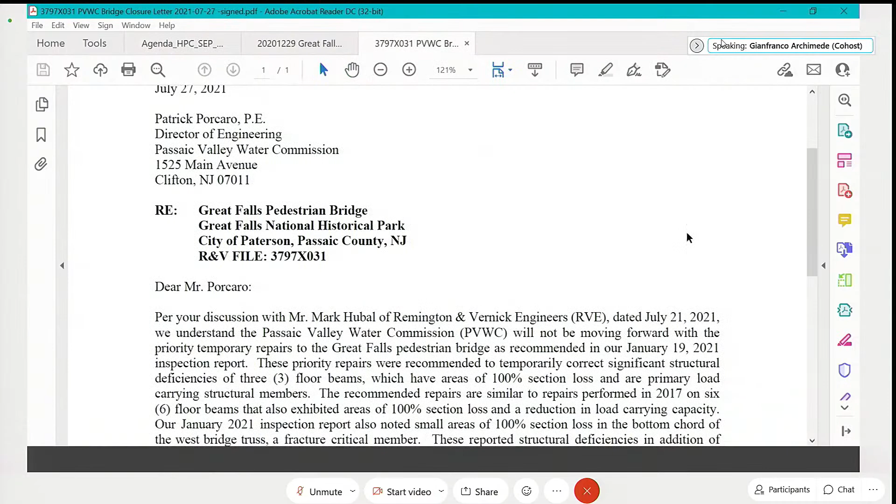Let's see here, that's July. Let me start with this one. This engineering group on screen now, Remington & Vernick Engineers, was working for the Passaic Valley Water Commission, the owners of the footbridge crossing the Great Falls Chasm.

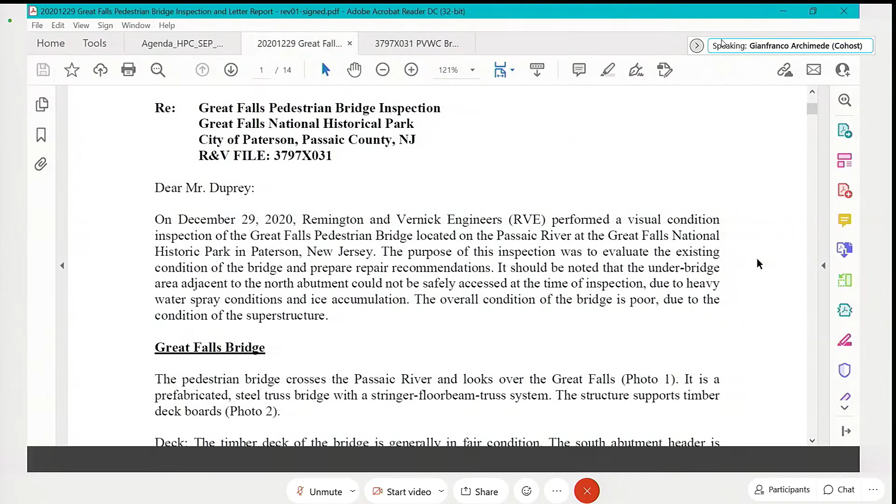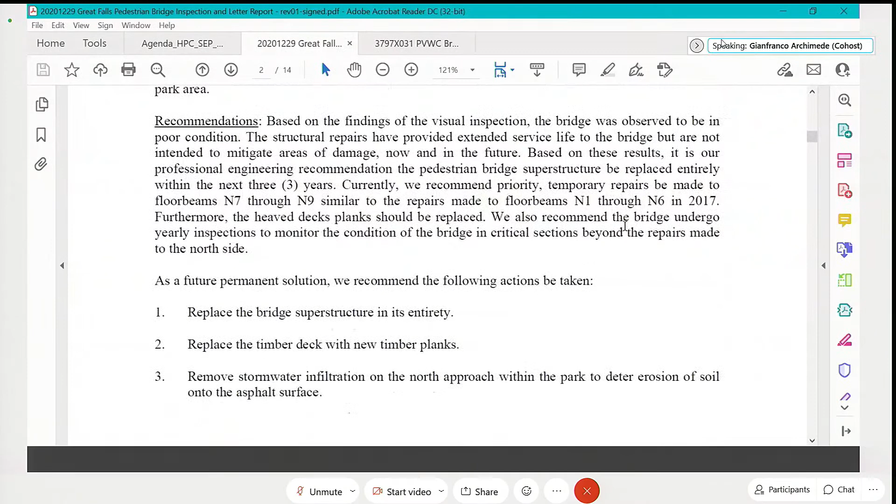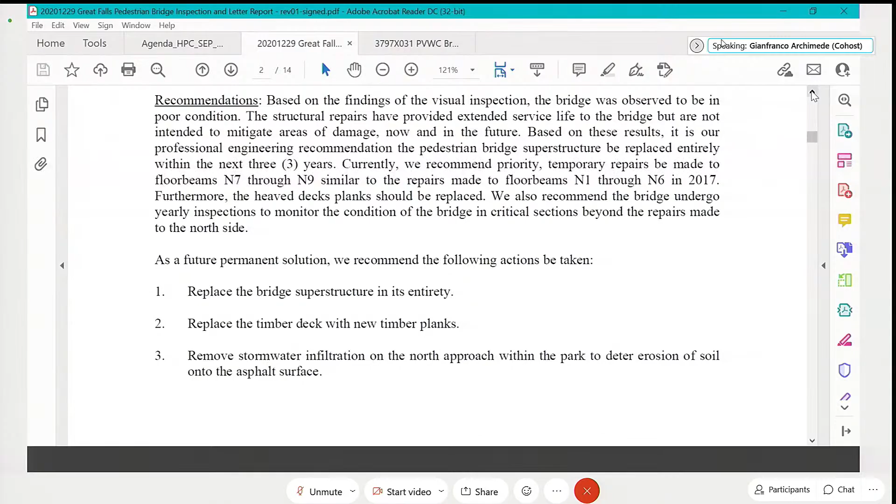This was an engineering report provided back in January after an inspection of the bridge. You can see they're reporting on the deck, the superstructure, and the substructure, and provided recommendations. Right here at the bottom of the page, they recommend the following actions: replacement of the superstructure entirely, replacement of the deck with new planks, and so forth. They identified substantial issues with the bridge to the point where they recommended the majority be replaced, though some parts could be repaired.

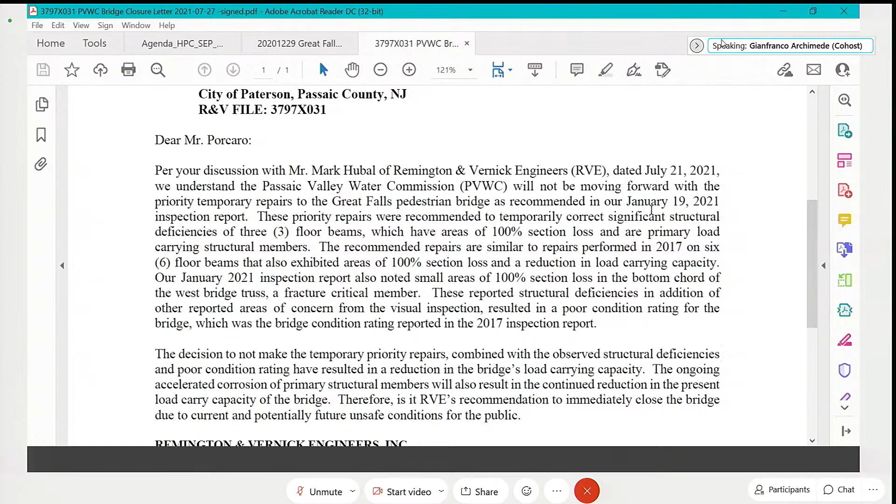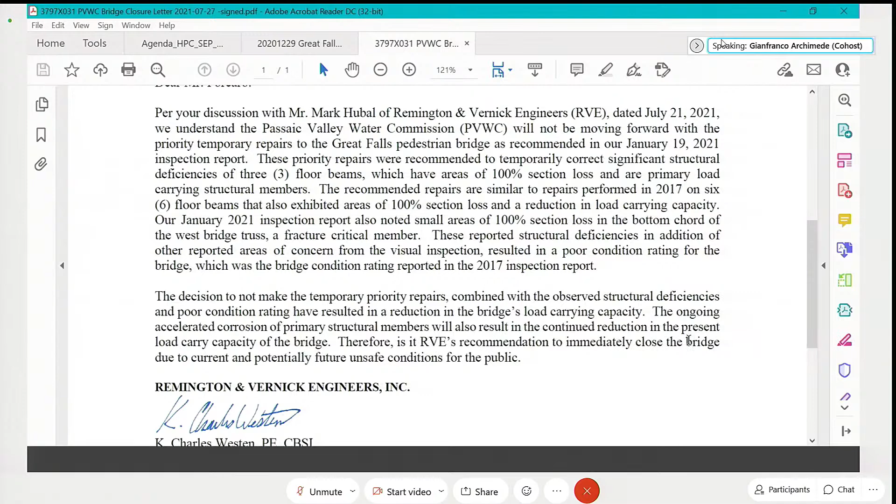The next letter, dated July, about 7 months later, is a follow up to the January 19th letter, indicating that temporary repairs had not been made. Down here in the bottom paragraph: the decision not to make temporary priority repairs, combined with the observed structural deficiency and poor condition rating, has resulted in a reduction of the bridge's load carrying capacity. The ongoing corrosion of primary structural members will also result in continued reduction in load carrying capacity. So their opinion is to immediately close the bridge due to current and future unsafe conditions for the public.

When an engineering group sends a letter like this, it's very serious. The Passaic Valley Water Commission passed this letter on to us. I was informed by Darren Bach, who got this letter about a month later, late in August—around the 25th—when I received copies. He did what he had to do by reaching out to NPS engineers with this information, and they recommended it'd be best not to keep the bridge open. So this happened immediately after we were informed, though the information came to us much later than the date on the letter.

So this is another reason why, with both bridges closed at the moment, having a walking tour of the district isn't really effective or efficient. In talking with Vice Chair Rafal, we thought it best to delay this until there's a better time. We've already started conversations with the Park Service about replacement of the bridge. We're looking at something that would cost about $1 million, and I'm not sure the city would necessarily be involved in its replacement at all, because the land on both sides of the bridge would be owned by the Park Service, and most likely the replacement bridge would be owned by the Park Service too.

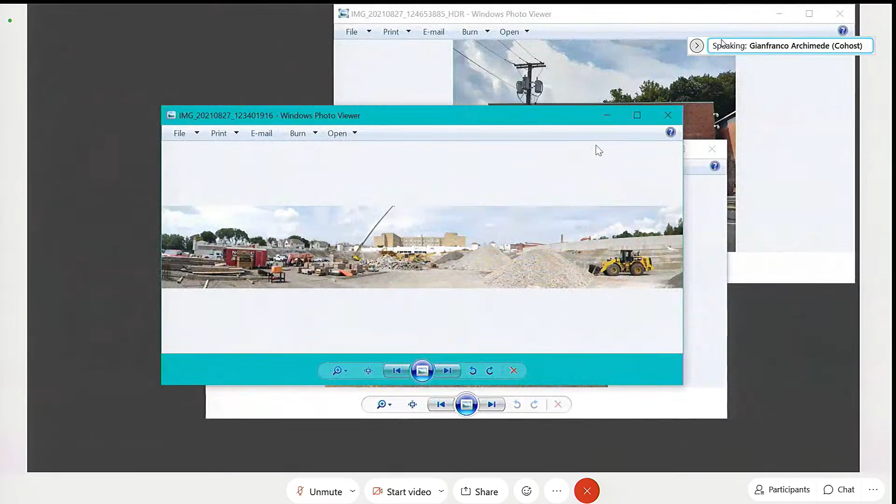Is that sharing? You see the photo on screen now? Confirmed, okay great. Here's a panoramic view of the construction site as it looks now.

You can see it's still a very active site. The piles on the right-hand side represent the demolition material that's been ground up and gotten ready for either taking off site or if any is to be used on site. I'm not sure, it's being stockpiled. But this is another good indication of the continued activity on this site.

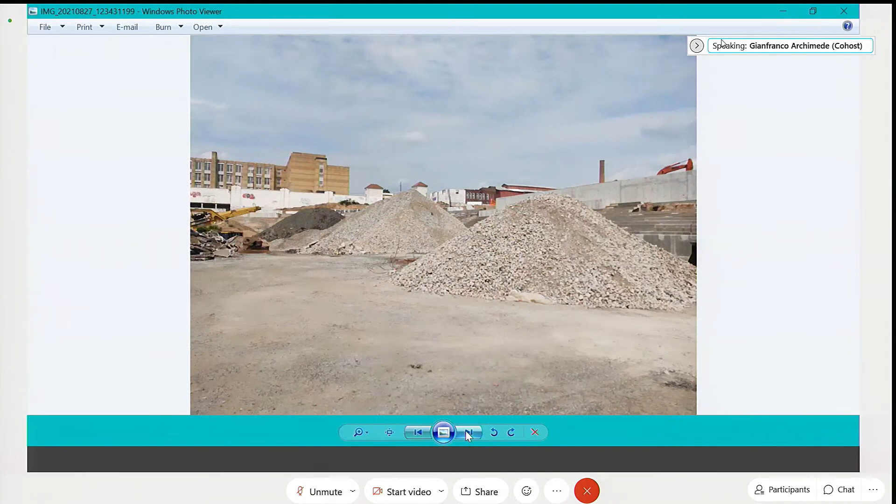This is a typical methodology for dealing with concrete debris. Some of the concrete that was demolished, for example, you can see in the background on the right-hand side of this picture the large new retaining wall that was cast in place. There was a failed retaining wall there, so some of this crushed concrete could represent that demolition portion.

The upper tiers of seating were also removed, demolished, and crushed. This is on the left-hand side. You see the tip of the crusher poking out here on the left side of the screen, and you can see the larger pieces here in the center screen waiting to be loaded into the crusher for crushing.

On the left side of the stands, you can see men working. They've completely removed all lead-based paint, so that was done for a while now. They've chipped out all of the steps, and removed deficient areas that were structurally needed to be exposed in order for the next phase of repairs and rehabilitation to start. Here's another view of this side of the stadium I'm talking about.

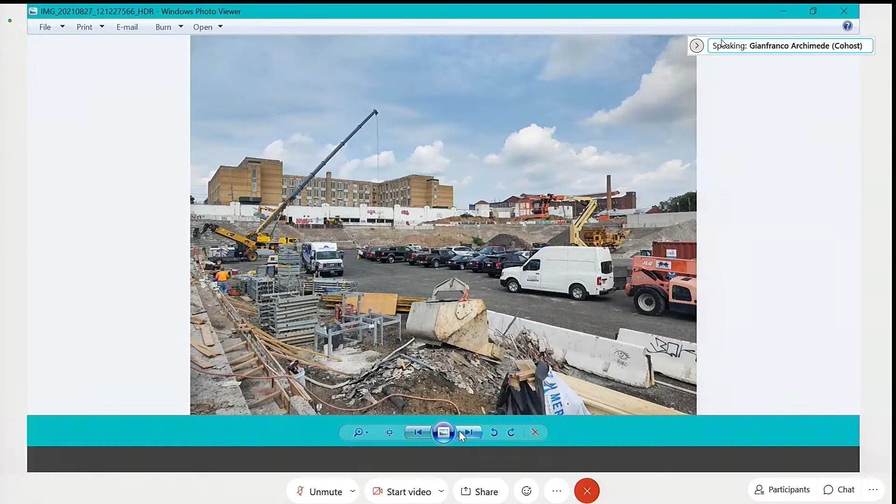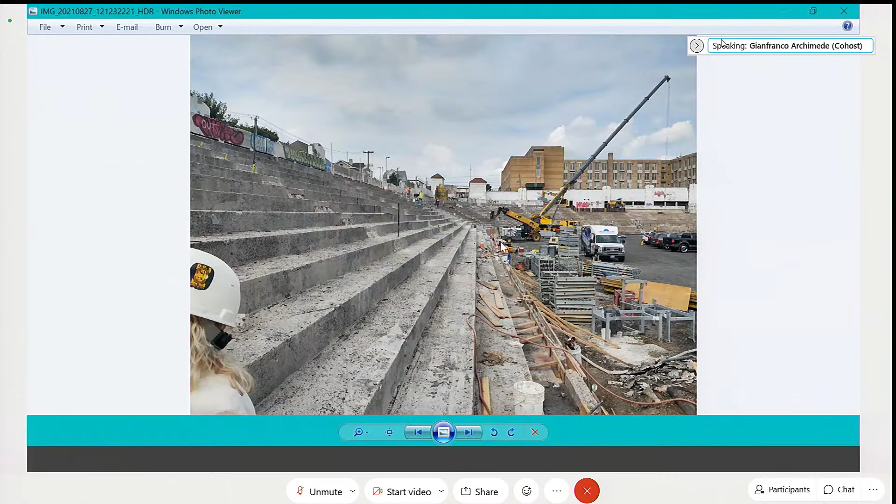Looking along the seating bowl, right here in the foreground where my mouse is, I think I'll post a picture of it next. Let's see. No, I don't.

But right here, you start to see formwork, all this woodwork here. The formwork is the beginnings of the rehabilitation of how the spalled concrete walls are being dealt with. This is what we call all vertical walls that have spalling or loss of material, like on the top side over the years.

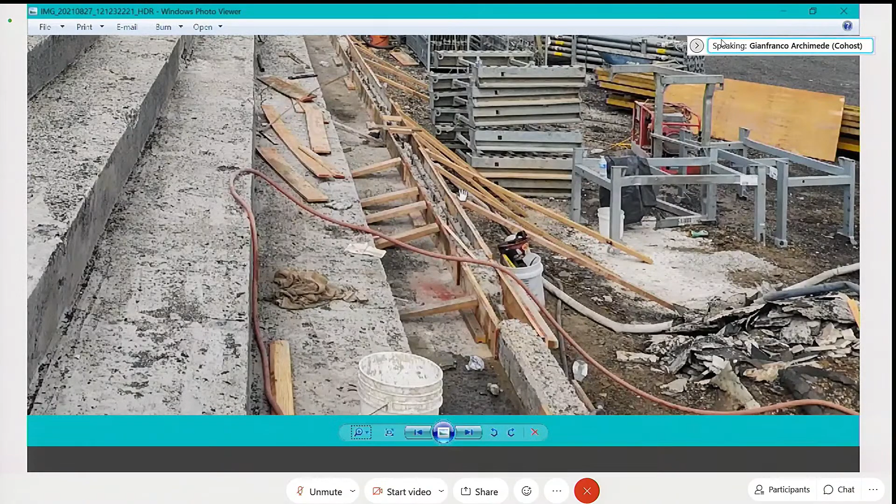I don't know if this will work, but I might try to just blow it up a little and move it. You can really look down into this now and see how the top of the wall is saw cut. The rebar, the reinforcing bars that are inside the walls, are exposed, and then these wooden forms are built around it. They will come back and literally pour concrete right into the top of the wall to create a new cap where the old concrete was lost.

So this is a typical repair that is correct for preservation purposes, and they'll be doing a lot of this in other parts of the stadium. There's a lot of degradation along the field wall in the back of the bowl, and on these walls on the rear of the bowl, up around where the concession area is.

You can also see here in the upper left part of the frame some concrete formwork that is starting to be installed, where the new toilet rooms and the new upper tier seating will be reconstructed. That seating was removed so they could build the toilet rooms on both sides of the seating bowl, kind of subterraneously, like underground, and then they'll replace the seating that was taken out on top of it. You can see the stairs have been ripped out, as I mentioned earlier as well.

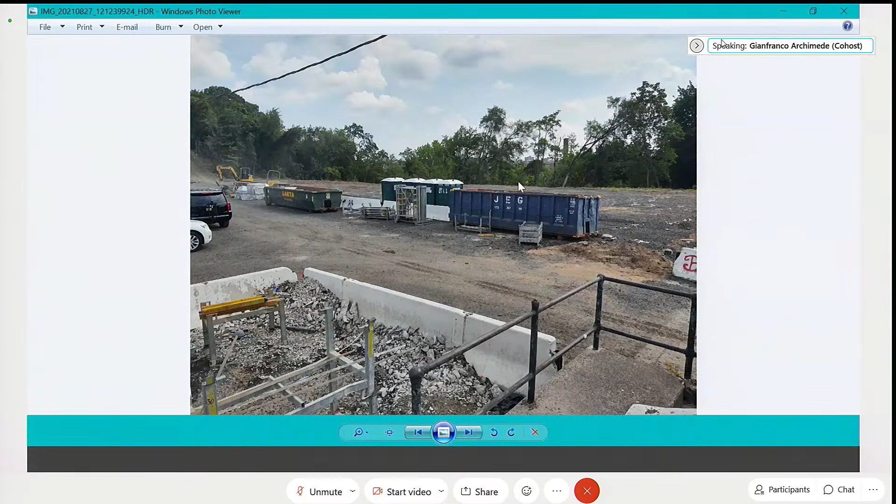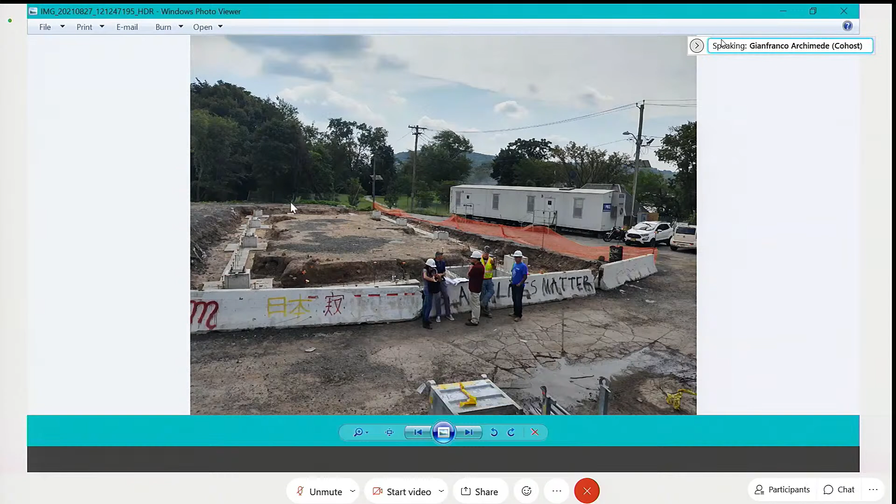Here's a view of the end of the field. I'll talk about the vegetation here in a moment. This is the site of the new building to be constructed. The last time I showed this to you, it was post-demolition. Now you see the footings have been poured in, so these are the piers where the new building can be constructed. This is the next step in its progress toward construction.

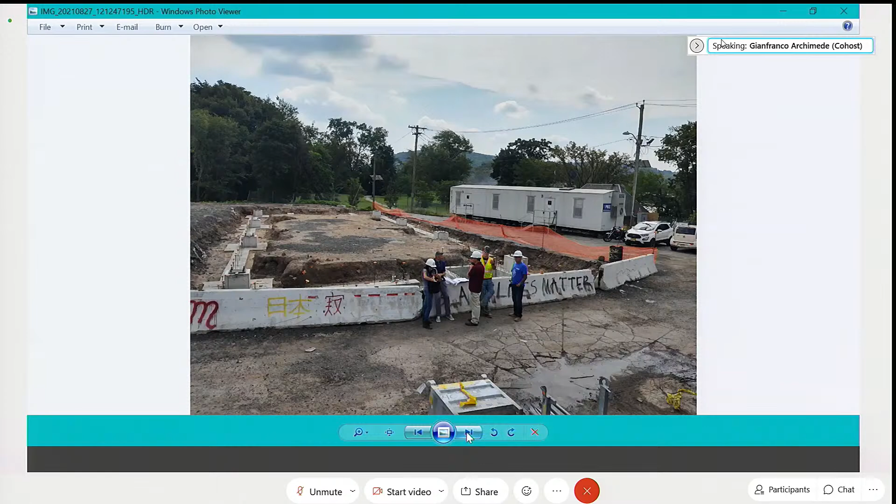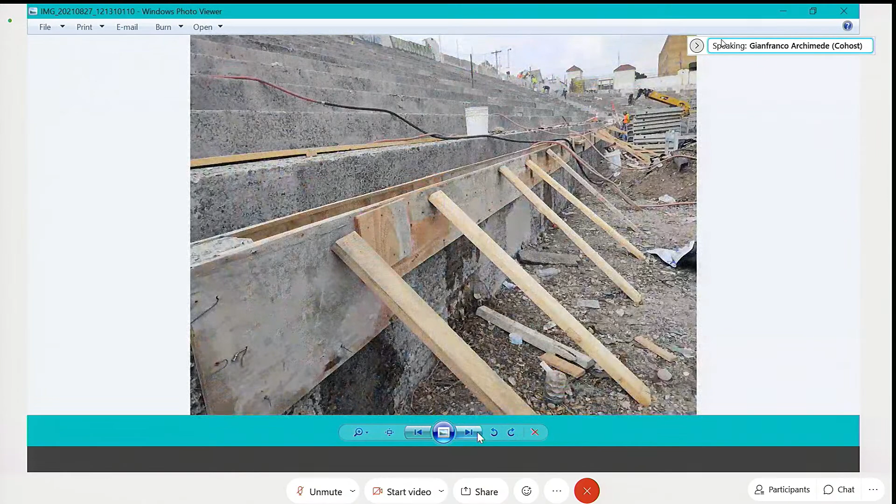Here's an overview looking farther beyond. We can see here the orange crane all the way into the distance, which represents the other construction projects associated with this stadium, the residential building and the parking deck building as well.

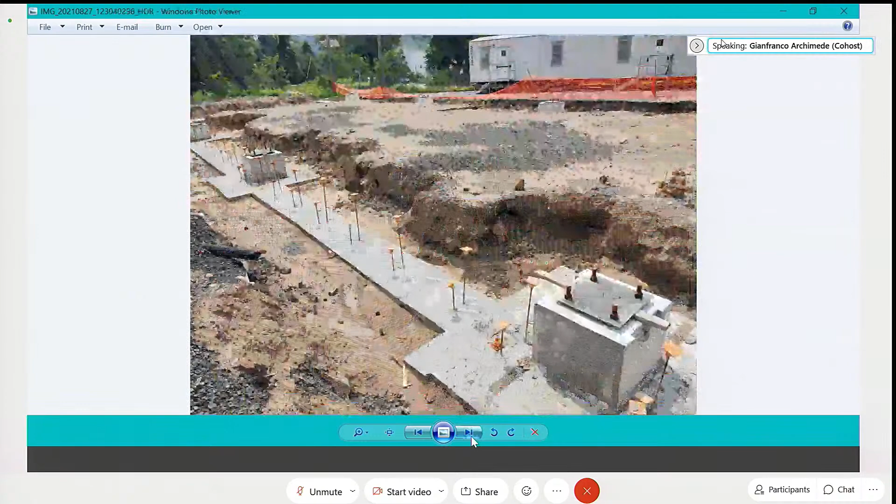Here's a close-up of the footings for the new concession building, both sides. This is more of a general overview, representing the site limit for the end of the field. This is really where the property line lies.

In discussion at my last construction meeting, they were talking about the scoreboard and the footings for the scoreboard, which would be right around here in this area in the middle of the screen.

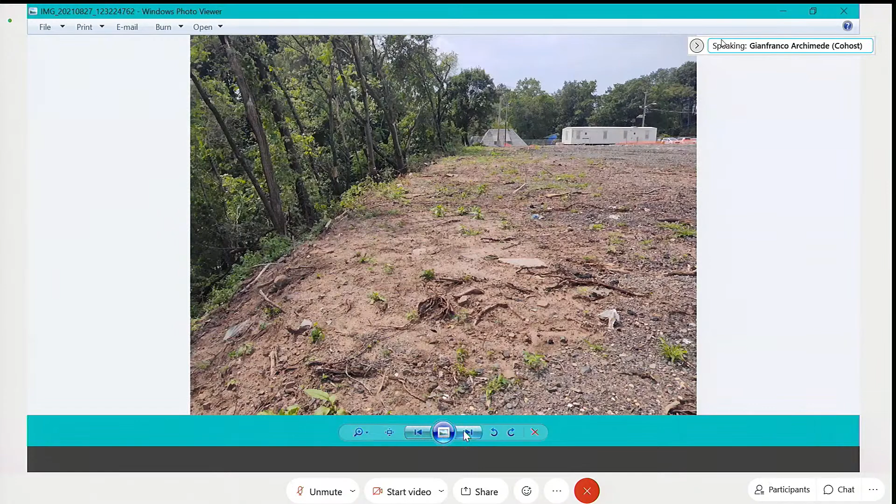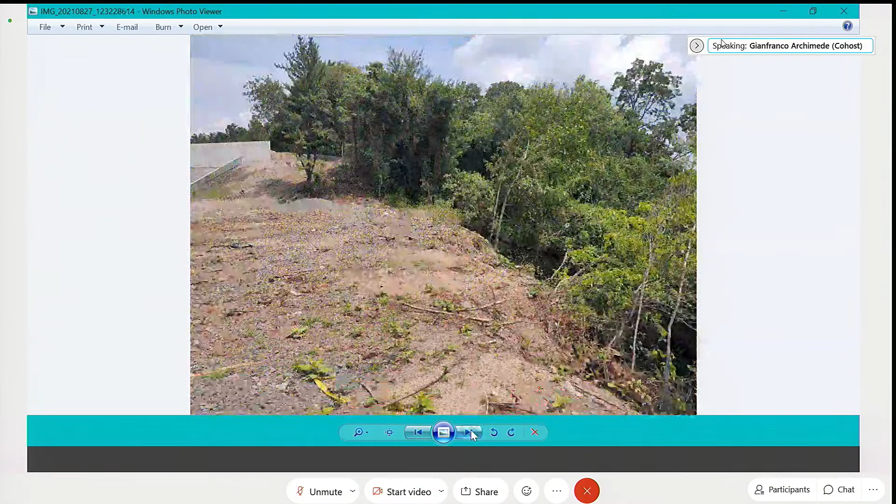I'm particularly interested in all this vegetation, which is technically now on city property. My discussion with them is to assist in creating a view shed, which we here at the commission have talked about in different design reviews over the years for the stadium.

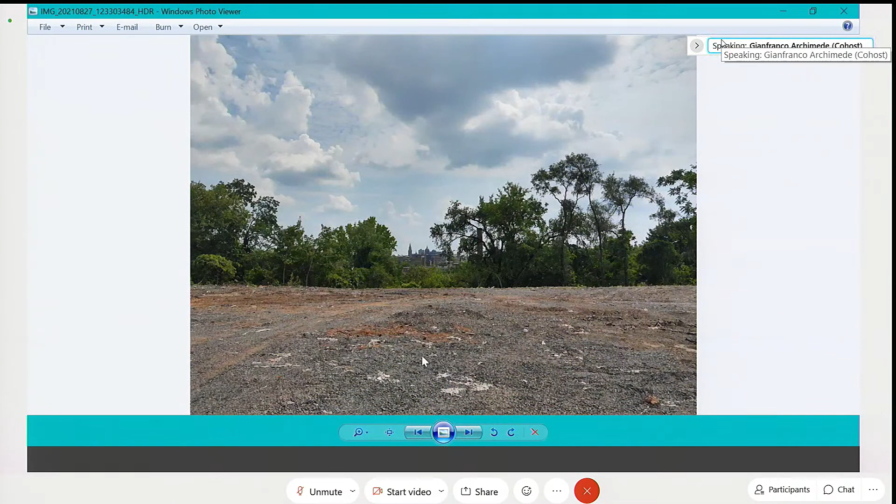This is a view now looking from standing on the new playing field toward the scoreboard. Our discussion was about removing this vegetation so that if you're sitting in the stands as a spectator, you can see beyond, you can see the city, Paterson, and beyond.

This was an important view shed that we believe historically was key to the siting of the stadium in 1930 in this location.

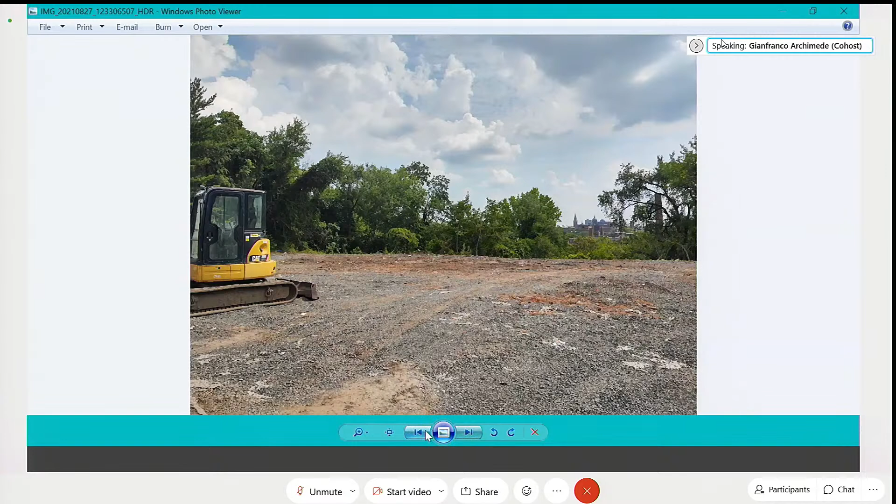We have received a small grant for this sort of work regarding clearing brush and stewardship of pathways. We're now discussing using that funding to clear this brush to further enhance this view shed. Here's a panoramic view of the end of the field.

You can see how effective it would be to handle some of this overgrowth. That concludes the photos on Hinchliffe Stadium. Are there any questions?

Executive Director, this is Chair Tate. What are your thoughts on the overall energy behind all of this in terms of schedule?

Well, they are continuing to move very quickly and aggressively. From what I understand, they seem to be continuing to be on time on most all items, and it's being run very efficiently and effectively by the contractor and the construction managers.

I did not have photos to show you of what's going on underneath the bleachers in the locker room area. They've got that all scaffolded up so they can address the concrete repairs underneath the seating bowl.

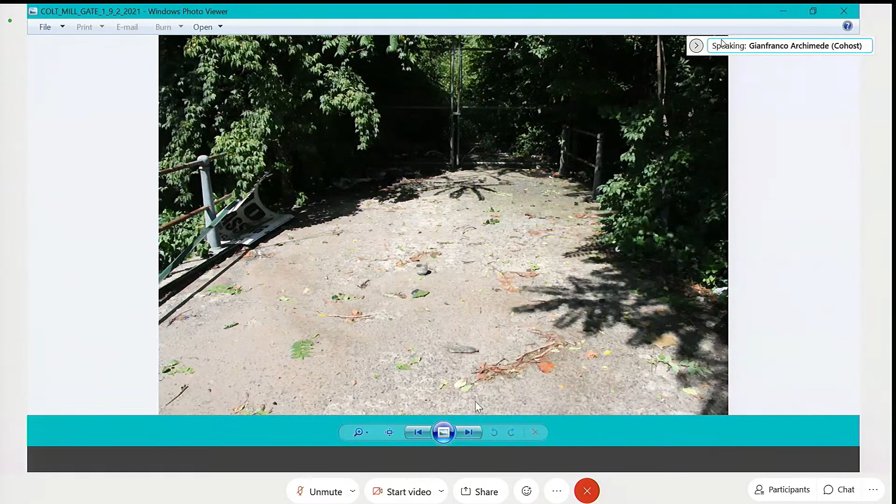There's some evidence here in this photo of water perhaps having kind of overtaken this, but here's the high point of the Passaic River. Looking at various parts, this is the raceway along Mill Street. You can see the wetness, so there was water in the raceway here as well. A lot of water here.

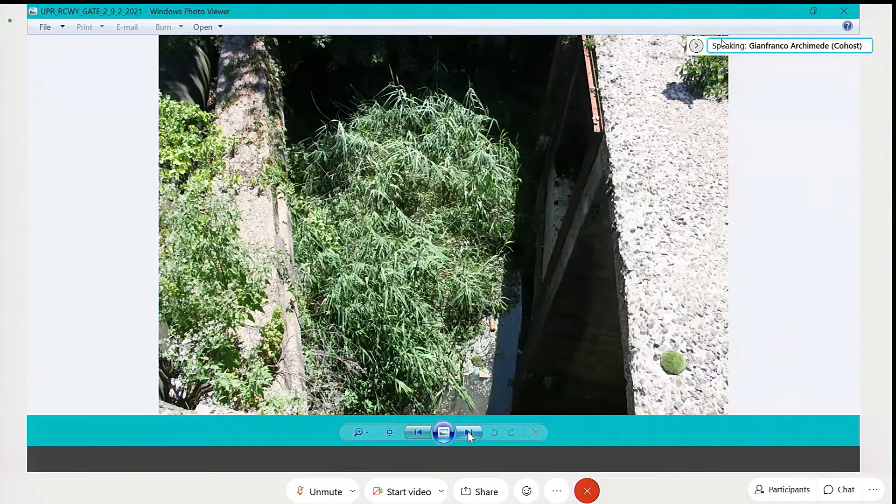This is, I believe, the other side—you can see the upper side of the gatehouse, and the water has gotten right up to the bottom of it, maybe even higher, as you can see another watermark here. So this was a major flood event, with some unprecedented results from the flooding caused by this hurricane, somewhat different than Irene.

But also significant. So we're going to be taking these photos and writing them up for the record, in the same way Commissioner Simpson just mentioned, to document where we advised attention be paid, so that in the next event—because these seem to be happening more frequently—we might be better prepared to keep the residents on Van Houten Street safe.

We did look at the Van Houten House. The Van Houten House looks intact—I'll just kind of blow through these. We have funding for an engineering study to button this building up and get it protected for future rehabilitation.

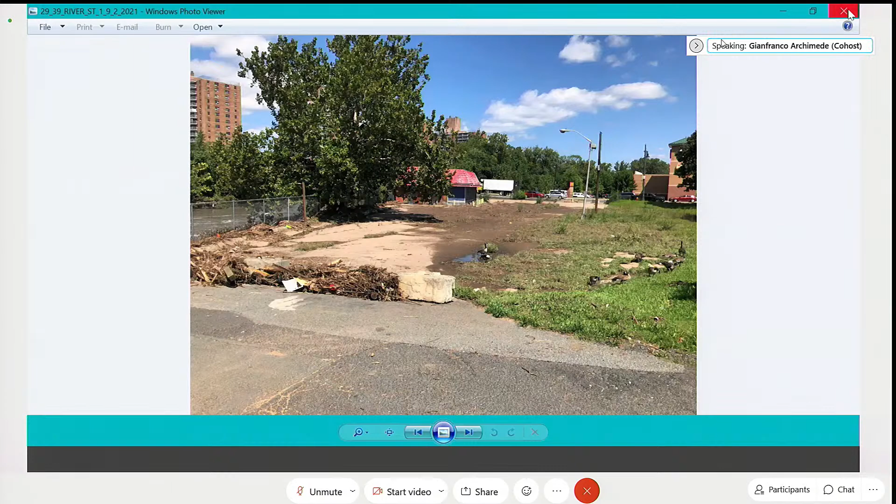And we're back to the beginning. So that's our report on how Ida affected the historic district, and luckily it did not have tremendous detrimental effects with regard to inland flooding beyond the raceway, which was a problem after Irene, as I just mentioned.

So another one of the projects listed on our agenda that I have photos to show you is the new gymnasium building on Morris Street.

So if you recall, the overall, if I can go back here, I have photos of it. Let me start with... yes, I don't have them.

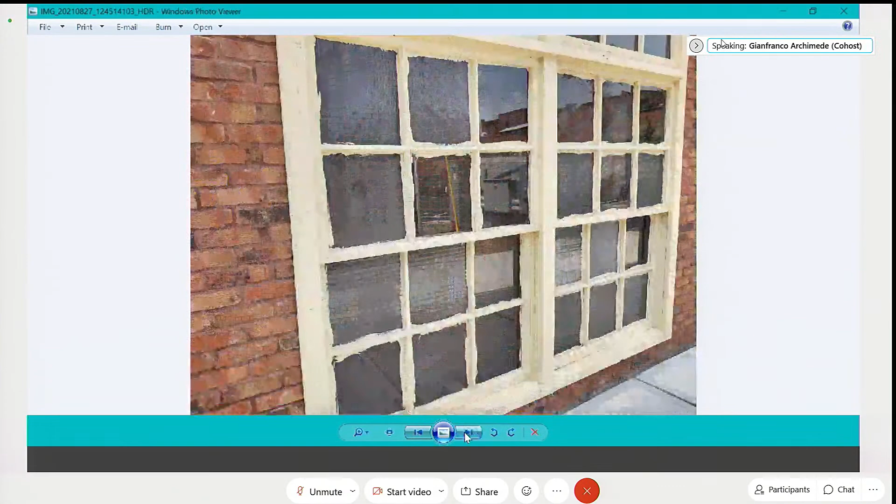Okay, so the larger building was rehabilitated for a charter school, and an ancillary industrial building was demolished to create space for this gymnasium, which was an important part of having a school. This is a concrete tilt-up building that I showed photos of when they were building it. It was very fascinating, I showed a video of them putting it up.

These are windows that were salvaged from the demolished building and put into the new building. They were rehabilitated and installed. I inspected them, and they've moved forward into actually painting them now.

You can see this isn't quite done yet. The photos were taken at a time we were still not completely done with scraping the paint off, but we've also passed along to them that this color should also be changed to a green color.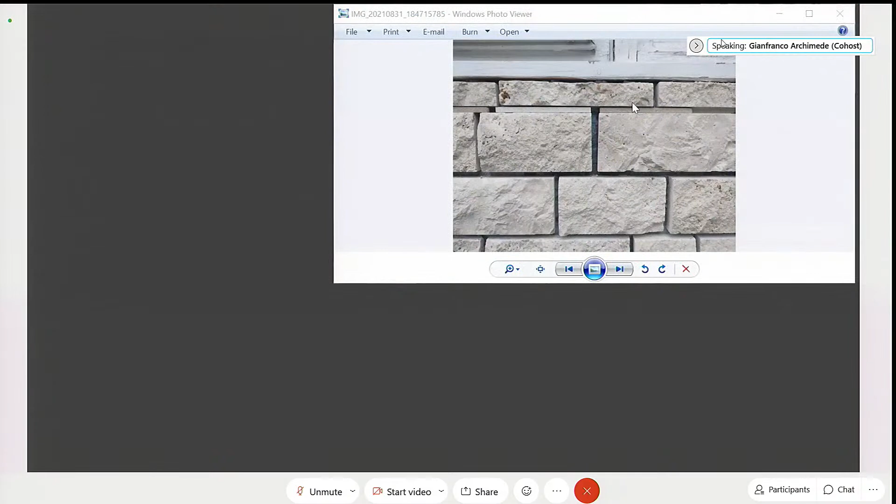It will be called Community Charter School of Paterson, and that's a lot of words, that's all going to go up there. I wasn't sure what they settled on in terms of their wording, but there's a lot of space, so it's not a bad idea to have more rather than less in a space like that.

So I had photos of Lou Costello Park as well. Executive Director? Yeah, this is the chair.

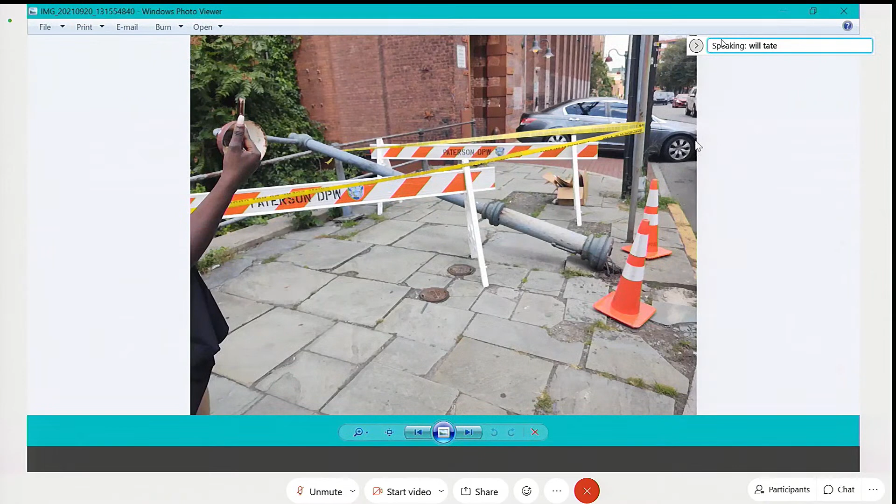Yes, thank you, Chairman, appreciate your comments.

I just found these photos, I took these photos today. I had these in a separate folder, so I thought these are important to show.

You can see that one of the things that did happen because of the flood event was this pole collapse. This pole actually collapsed during the flood, during the hurricane event, and today a lot of us were down there. I don't really have a close-up photo of it to illustrate, but I can just blow this up a little bit more.

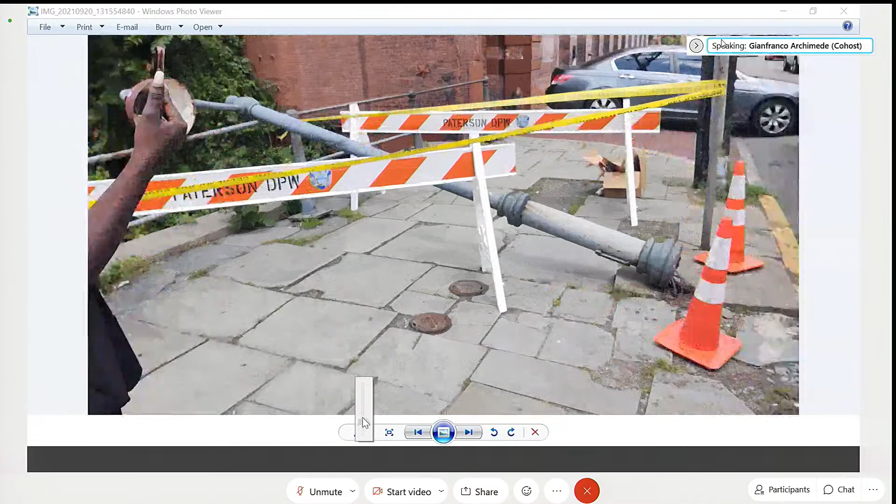You can see that the wires here in the base are still connected, which was something that PSE&G came out to help us shut the power off so that these wires could be cut, and our DPW could remove the pole and stockpile it with the other poles that I have in storage, pretty much on the ATP site at the moment, from the Lou Costello Park project.

Now you can see all this kind of stuff here is rust, and the base that's mounted into the concrete that holds the pole up is completely rusted out, causing the pole to collapse. It could have been the high winds that finally had this pole collapse, but the degradation of rust obviously happens over a long period of time.

This is the first time, without a car hitting a pole, that I recall a pole has actually fallen down because it's been rusted out. This is something that can continue to happen in the district, which is a very serious problem. This could actually kill someone walking underneath if it falls at an unfortunate moment.

We did review in our last meeting, and I went over a presentation about our lighting design standards, introducing the idea that I was ramping this discussion up with the administration. A council member was here on site with us today, and I discussed it with her. Councilwoman Mimms has been championing street lighting throughout the city and has been on top of that for a while now, so she was concerned about this. I think this conversation is going to start moving along for obvious reasons, and this is just another example of why planning for this is so important.

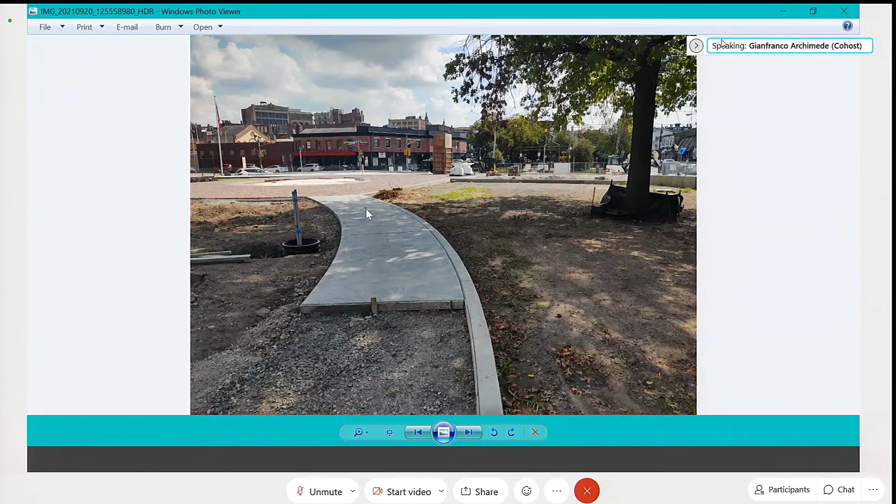Here's a piece of the curved walking area that forms the circle. In the distance you can see the reclaimed pavers, and the spot where the gazebo used to be, which is now going to be a performance podium reinstalled. Here's a closer picture of the pavers that existed at the park, reclaimed and now relaid—they're all in place—and the area where the podium will go.

These are the slates I mentioned as a possibility for engraving with slogans, like what Lou Costello said—'Who's on First'—though it hasn't been exactly decided, but there could be engraving in these areas. In this rectangular area, we're also looking at placing on a base a cast bronze plaque with a bas-relief of Abbott and Costello, their faces looking at each other with words in the middle. That's another design feature we've been working on, discussed during our review of this project, along with the performance podium in the center.

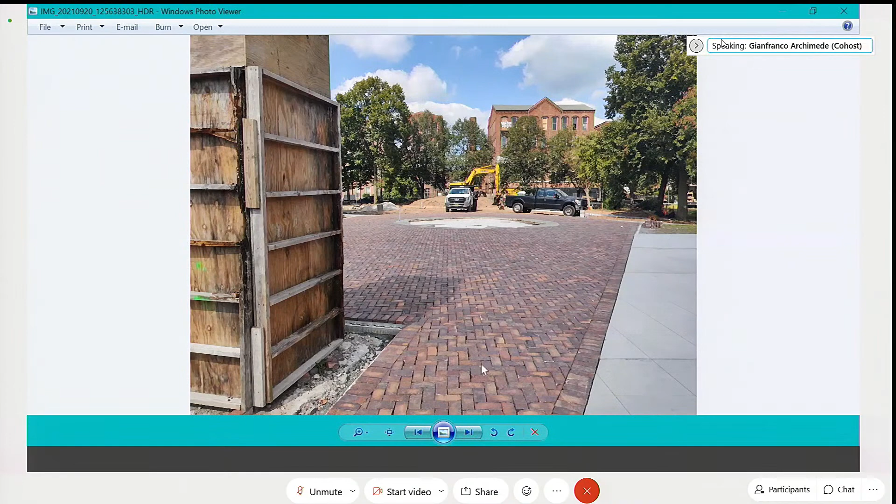Here's another view of the paving, looking toward the grass area of the park. These are the steps that are now formed and completed, and you see a lighting base here. This side is still gravel and will get a planted, sod surface. The other side is already a cast concrete paved surface where there'll be tables and chairs.

Here, you can see these white pallets are the chessboards—cast concrete chessboards—and the tennis table that we saw in the design presentation. They're currently moving to demolish the peripheral sidewalk and install new lighting. This was the day they started to demolish this portion of the sidewalk.

Here's a photo of where the playground will be installed. The play surface is defined by concrete curbing and this retaining wall on the Cianci Street side of the park. I'd like to point out that I sent around a PDF to commissioners to help decide about the color of the play surface.

I've received responses from about half of the commissioners about options A, B, and C, and option B, or option number 2, seemed to be the most popular. I was hoping I could ask anyone now if they'd like to tell me during the meeting what their preference was from those 3 options. So I'd like to pause here and ask commissioners if you'd like to sound off now about which option you prefer.

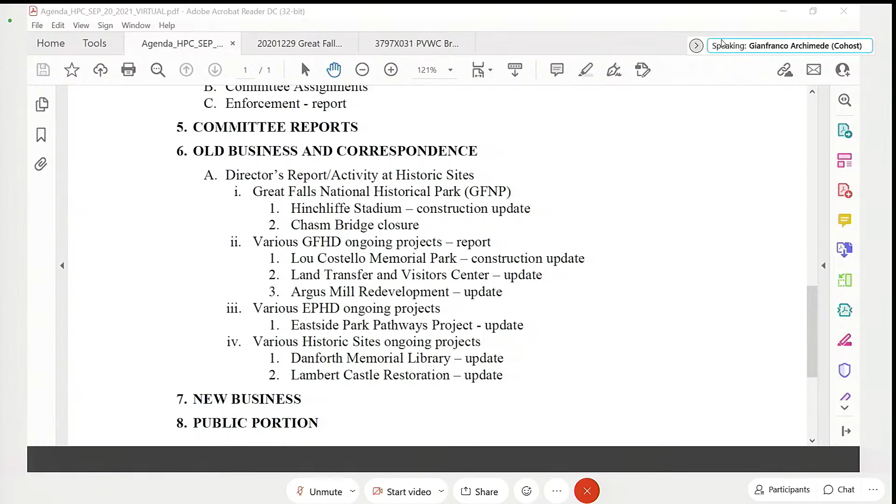I'm looking now for the document to put on screen, so if anyone, just be patient and I'll get it up on screen.

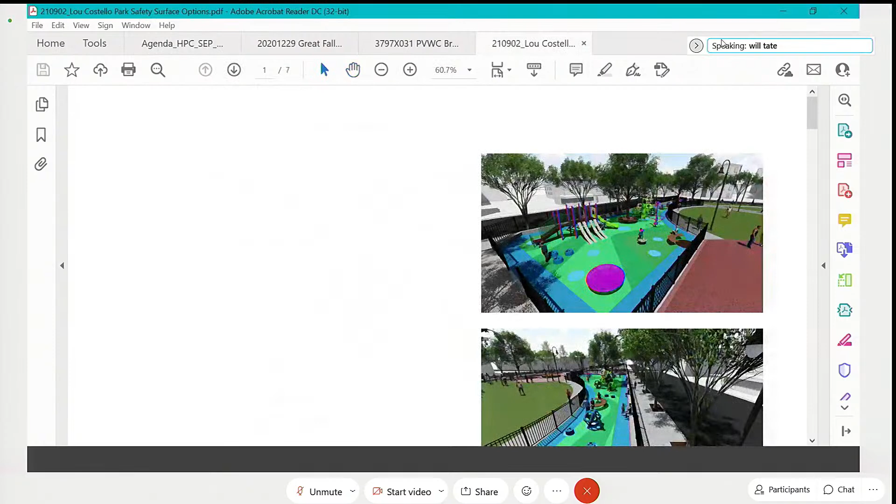This is the chair. In the interim, I think Commissioner Corbo brought up a great point. I think the commissioners who did vote should also chime in, just so there's a balanced perspective. Although this is not a final vote, it's not a formal vote, it's more of an informal conversation regarding this.

We learned that the color scheme presented to us was not the final one. There was specific research done on colors that were appropriate for children with autism that would assist them, where one color over another would be preferable. So we asked for input about that, and this is part of what was provided.

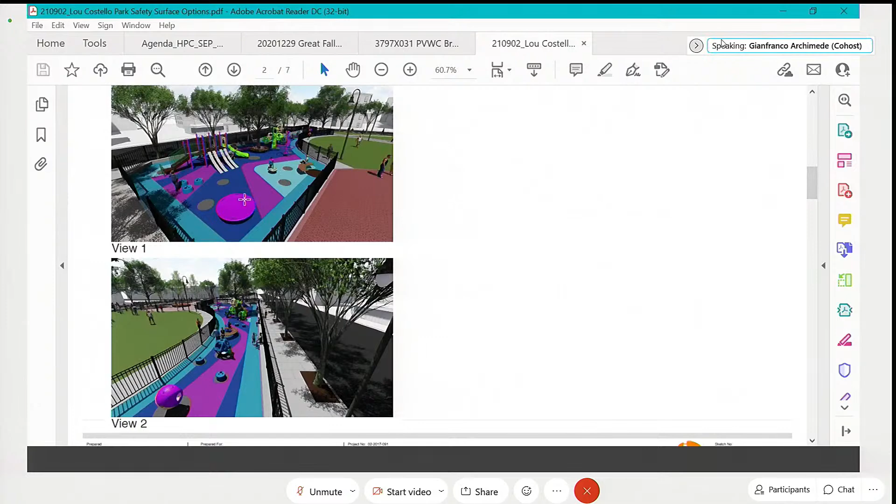I want to show you the third option on the screen. It's sort of a purple, light blue, and dark blue combination. This is option 3. I'm scrolling up back to option 1, which is the earth tone, and option 2, which is the green and blue combination, light green, dark green, and medium blue.

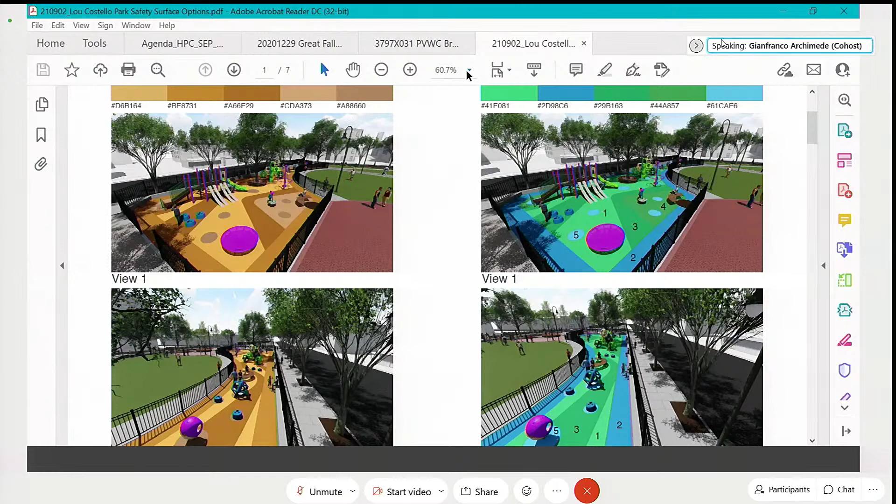Also, the play equipment that you see—let me blow this up a bit to see it better. The play equipment in place is like a bright purple, there's one here where my cursor is going around. I'll bring it over and blow it up even more. It's a very bright green, very bright purple. This is one of those rotating rides that you sit on and rotate yourself.

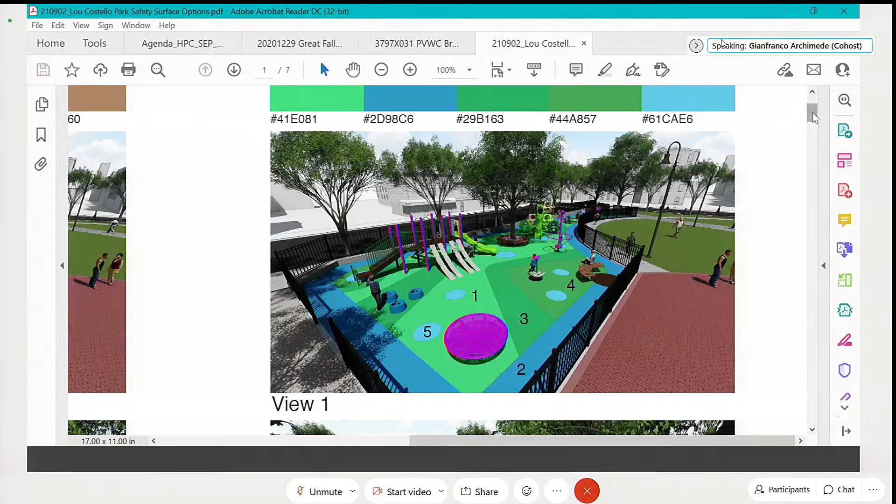These are the actual colors of the equipment, so you'll have a chance to look at the scheme with the actual colors of the equipment there as well. So far, people who responded seem to be attracted to option number 2 more so than option 1 or option 3, which is down here.

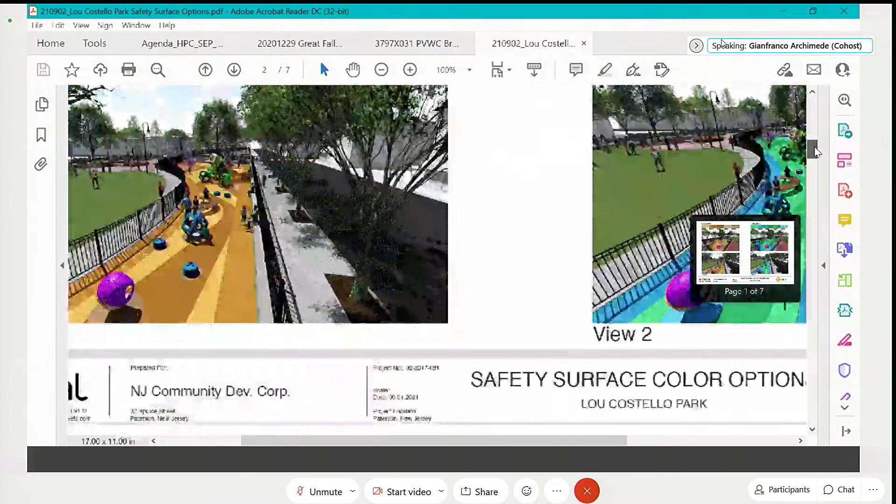So anyone want to provide some input? I see Commissioner Corporal's hand is up. Do you have any insight? No, I'm sorry, I didn't take it down. Okay, this is Commissioner—this is Chair Tate.

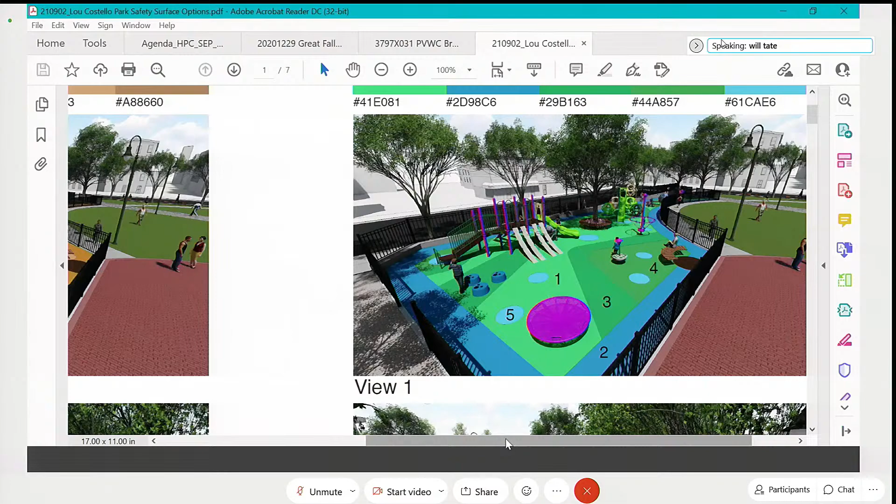I tend to agree with the commissioners on option 2. I believe they're all nice options in the sense that they're subtle and the contrast between the colors is not too drastic. I think the reason option 2 is most attractive for me personally—I don't know if we have any standards or regulations, but I know studies have been done for autistic children.

I think it's sort of the playfulness of the earthiness, the blue water, greenery kind of thing—I always try to relate things back to nature in some way. I understand that option 1 is earthy, but I think there's something grandiose but subtle about option 2, which I find fascinating.

Just as a disclaimer, I'm not a psychologist on colors and autistic children, but I do believe that this color scheme, from a perspective of aesthetics and understanding that studies have been completed, works. I think the purple adds a layer of contrast with the palette on the screen, and ultimately could be of interest for that zone. It doesn't scream too far out there, if that makes sense. And that's just my perspective.

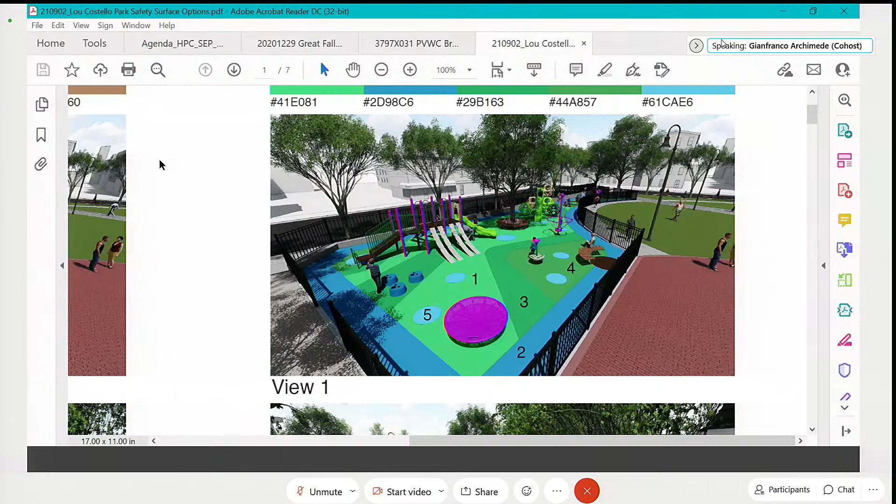Again, I'd like to invite other commissioners if there are any other perspectives. Well, thank you to the commissioners who spoke up. I'm going to advise them to go along with option 2. Thank you again for taking a look at this.

I just wanted to mention, under GFHD, that the Argus Mill redevelopment project is now in a place where they're trying to finalize and close on their funding, and they're very anxious to get that project into construction as well. In SHPO review, we've been consulting on some monitoring or archaeological work, to the level of effort with archaeology to be invested as part of the project, so I wanted to update you about that.

The Section 106 review entailed reaching out to SHPO with plans, and the archaeological report required by the commission was delivered, and there's been additional effort requested. So I should be able to update you again on this project, possibly getting underway soon.

That would conclude discussions about Great Falls Historic District projects. Moving on to Eastside Park Historic District, I had informed the commission last time that I had a project kickoff meeting for a grant-funded improvement project that we reviewed for pathways, traffic control and parking, parking striping, and the whole scheme for Eastside Park to be safer for pedestrians and more friendly for pedestrian users especially. So that project is underway.

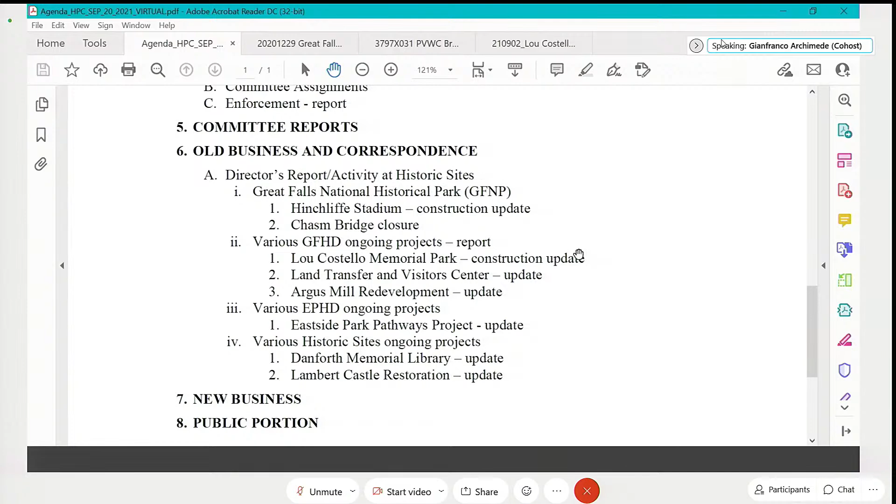As for various historic sites, I'm pleased to tell you that the grant received for the limited rehab of Danforth Library—we just completed our draft set of documents and project specifications and sent them up to the SHPO, the State Historic Preservation Office, and we got a green light from them to move forward. So we are now finalizing the plan set and specifications toward getting to a place where we could be bidding soon. That's also really good news.

And Lambert Castle's restoration is continuing to be ongoing, and I wanted to give Commissioner or Vice Chair Ruffel a chance to say a few words about what's happening at Lambert Castle. Sure. I actually was—hold on, this computer.

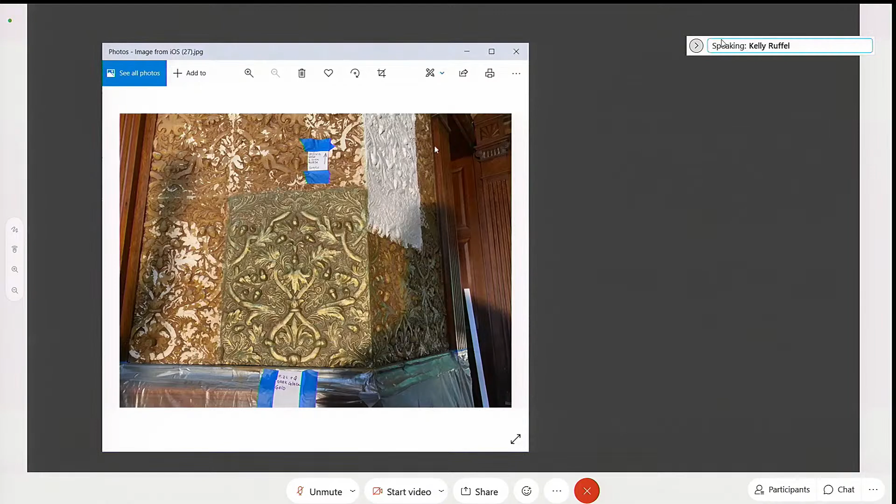Does everyone see? All right, yeah. So I'm just going to show a few samples of where we're at in the project. We're very fortunate that we'll be able to start closing up a lot of the finishes inside of the castle, given that the roof material has finally arrived. We were getting quite worried we would not have it in time before the fall and winter season. Once the new roof is placed on the castle, we will start to finish a lot of the plaster work, painting, etc. I find these to be the fun photos, showing the ongoing restorative work we're doing in the castle.

There's only about 8 images, so I'll try to make this quick. The image before you, if you've been to the castle before, is the dining room. All of the walls are plaster with very intricate detail. Some of this had crumbled as we started to clean and take off all the loose paint. Through historic paint analysis, we're refinishing the plaster work and plaster painting, with this panel mock-up you see before you. As you can see over time, that has changed quite drastically.

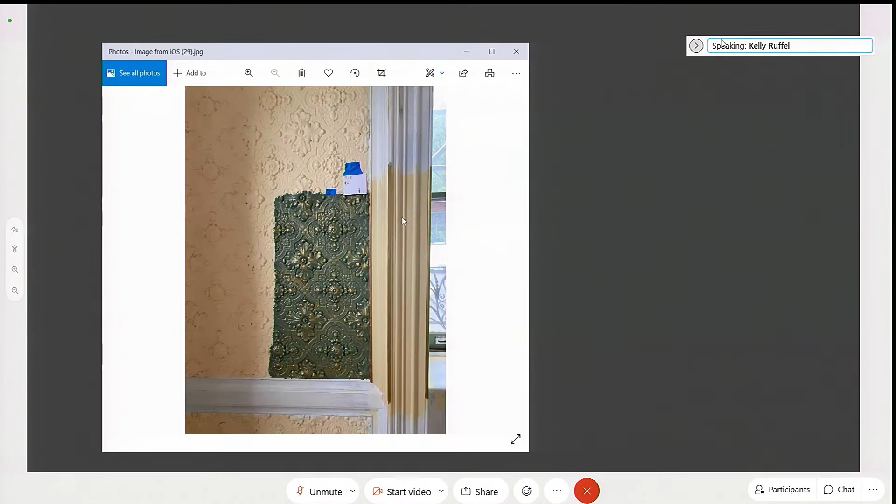When we get to the side — out of order, hold on — even the window panes, a lot of the woodwork has multiple colors. So this room will be completely and drastically different than when we started.

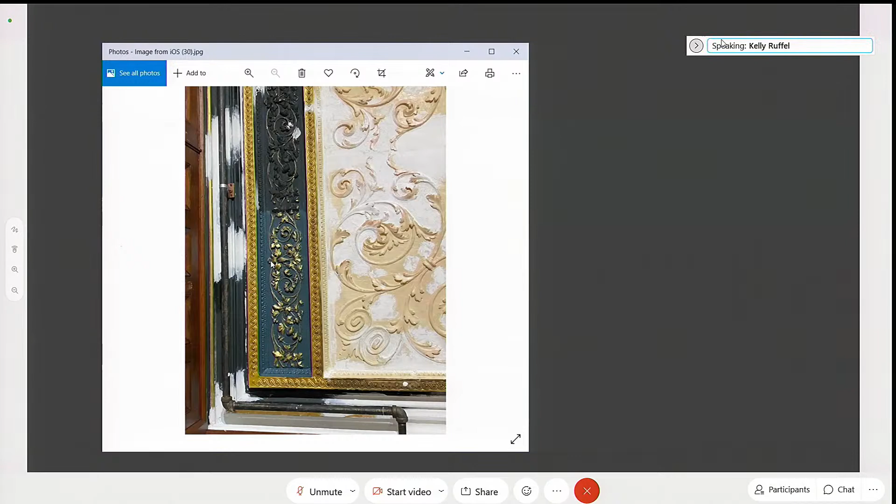Again, these were all mock-ups just to approve the different coloring. In the foyer, the center hall, a lot of the plaster had deteriorated over time, so we've been doing a lot of plaster remolding. You can see even the discoloration. He had, again, a lot of gold accents. A lot of the original colors will be brightened up. There's a lot of sanding and patchwork — these are samples there.

In the painting, we're going to see a lot of color again — different green hues, different beige hues, even pink hues. We've also approved all of the wallpaper that will be reinstalled in the various rooms that had wallpaper. For what we had, we were able to exactly match maybe 3 of the 4 rooms that are going to have wallpaper. For his waiting room next to his bedroom, we had to guess based on historic images.

This room here, showing the column, is the atrium. If you've seen the center hall, the atrium goes into the breakfast nook, and the breakfast nook traditionally had this wall closed over, covered in lattice, with intricate columns, woodwork, and decorative detail. We're bringing all of that back during this process. Probably by the next meeting, I'll have some of that woodwork to show you.

But again, just kind of showing the drastic difference for what the columns will look like. And this room is very bright blue and gold. So this is just some finishing work there.

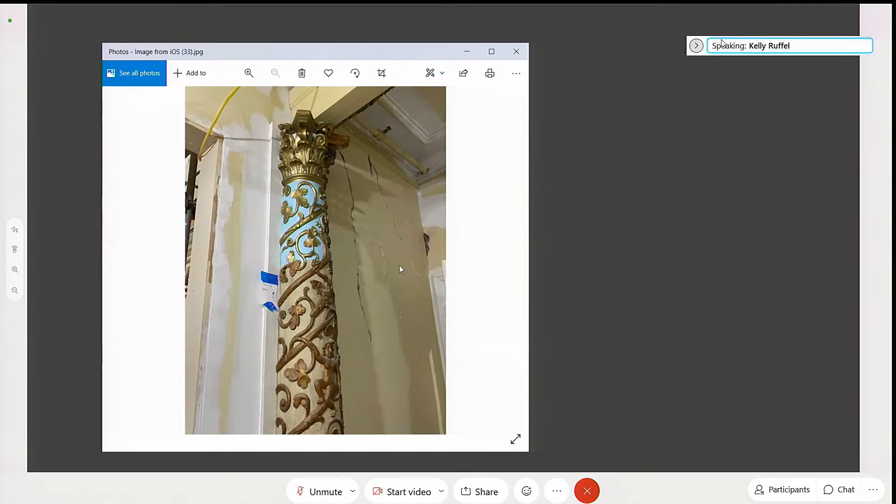You'll see, maybe not so much in all the photos I showed you, but there is a lot of plaster damage as we start to scrape old paint. We have to repair a lot of the walls throughout the building.

This is the atrium, so this one's kind of cool because you can see all the scaffolding. The skylight will start work in the next week or so on the repair, which is why we have all the scaffolding inside, so that will come down and be entirely redone.

I have this image to show you a sample of the column work, and what's interesting, as I zoom in, is that this entire project—all of this painting and delicate work—is being done by hand, by a crew of 2 people working on the entire building. So we'll see a lot of different accents throughout each of the rooms.

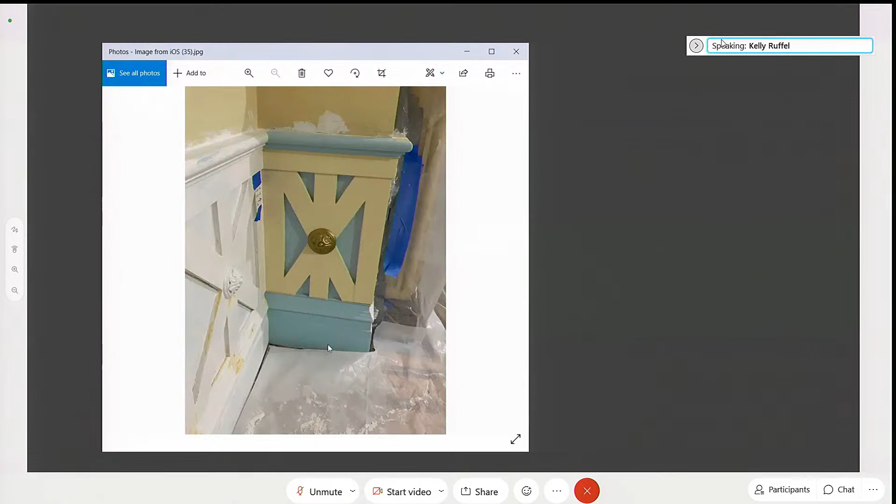This goes back into that breakfast room, just a mock-up of what the painting schematic for that room will be. And this is back to the foyer, so we have different gold samples—probably 20 different gold hues being used through this project.

Again, a lot of this is done by hand, because based on the analysis, everything was painted a different color. That's the last picture I have, so I'll stop sharing my screen. I just wanted to show you some of the finishing work, because this has been our focus for the last month.

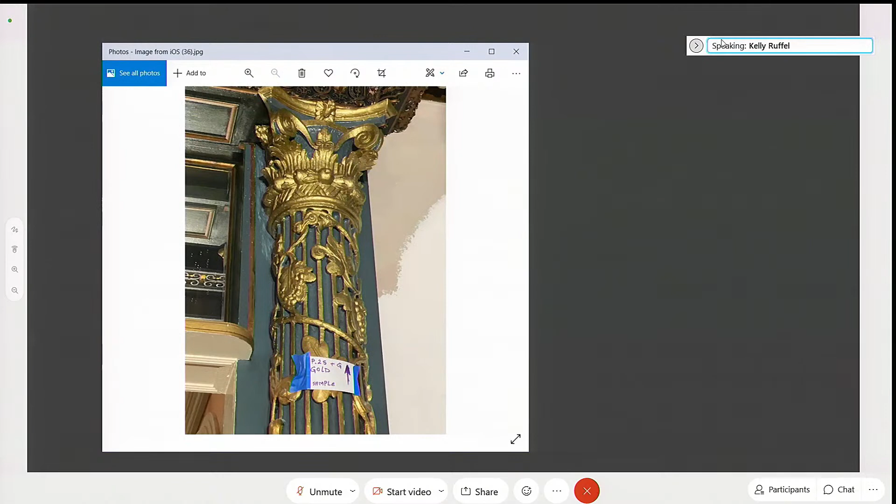Tiling, wallpaper selections, different stones, wood flooring, varnishes that we're going to be using. So we really are approaching the end of the project. The castle, as of last week, is still on schedule—it would be completed by January 20th, 2022. Any questions?

Vice Chair, this is Chair Tate. I want to say thank you for your comprehensive research and very selective, prescriptive finishing for the specific detailing throughout this project. I remember when you first started it, and to see where you guys are now is fascinating, it's tremendous. I think the revival of these details takes the narrative of Lambert Castle into the next generation, and I commend your work and your team's involvement in this process. I'm excited for the completion. Thank you for your stellar work ethic and involvement in all this, and your presentation. I just wanted to put that out there. Thank you.

Thank you, Chair, very much so. Thank you, Vice Chair Ruffel, for your presentation.

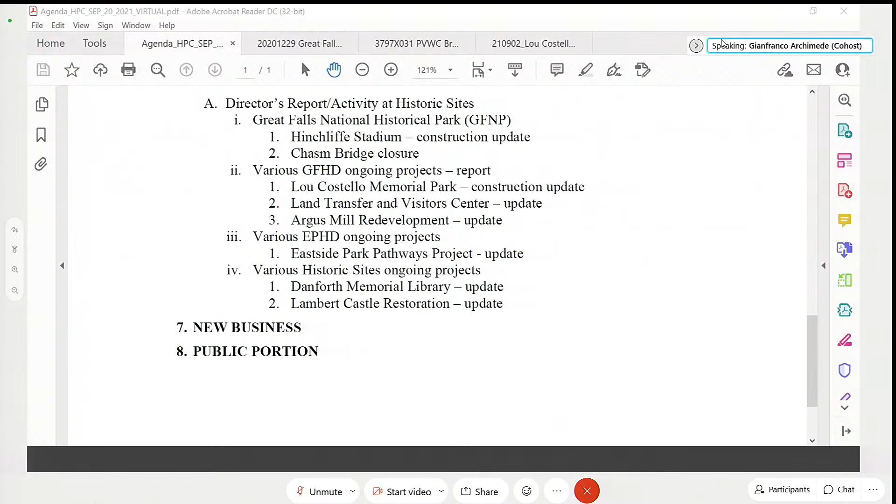Since that time, the COVID situation nationally has ramped up again, so we decided to stick with this virtual format for September. I also received an email from the administration about October's meeting. Because the city council is doing budget hearings, we've been asked to continue virtual for October. So I suggested we come back for our first in-person meeting in November, before Thanksgiving, if the COVID situation stays steady where it is now. That's the first thing, we're looking at November as the target, and I'll inform everyone well in advance to be ready to come in. Then I mentioned about staff.

Staff are now required to show vaccine status, which is not new news, everyone has heard what's been precipitating this. That doesn't apply to people coming into the building, including the public, which is the policy for everyone else other than staff. It's the same COVID precautions and protocol that have been in place in our public buildings the whole time, which is social distancing and masking is required. So the answer is no, you wouldn't be required to show proof of vaccine as a commissioner or as a public person coming into the building. It would just be the standard protocol.